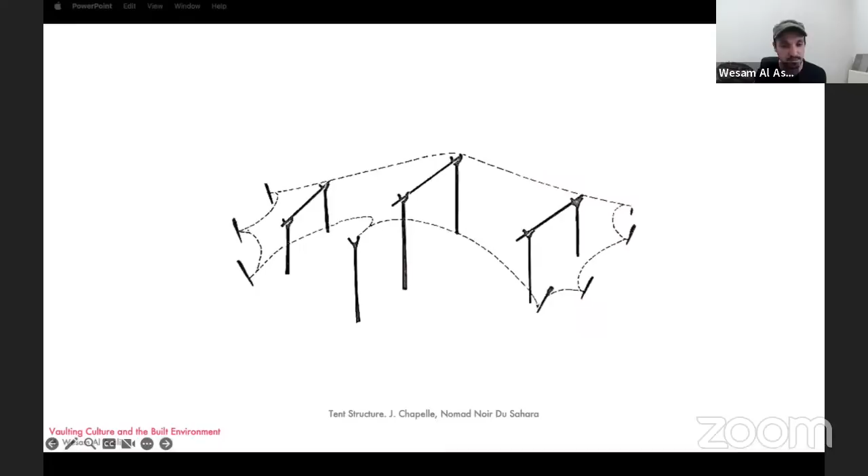Now, we note the main structural and architectural aspect of the tent through the drawing of the membrane, the poles, and the stakes. But what happens if we ask the same question of drawing a tent for those who inhabit and make these tents? We will not only get the notion of the structure, but also the cultural, architectural, and social meaning of the spaces described by the structure.

I think it is okay to have an abstracted vision of a phenomenon to understand how it works, but sometimes we forget how our knowledge as designers and engineers dwells in the making and inhabiting of the built environment. With today's pressing issues of environmental and social impact of design, the skill to dialogue between making knowledge and design knowledge is very much needed.

In this panel, we want to initiate these topics and question the relationship between, for example, automation and crafts, between materials and labor, and between hand and digital fabrication, so that all can be equally important and operate in the same sphere, and to harness the existing building culture and look for bottom-up approaches that learn and develop building crafts through technology.

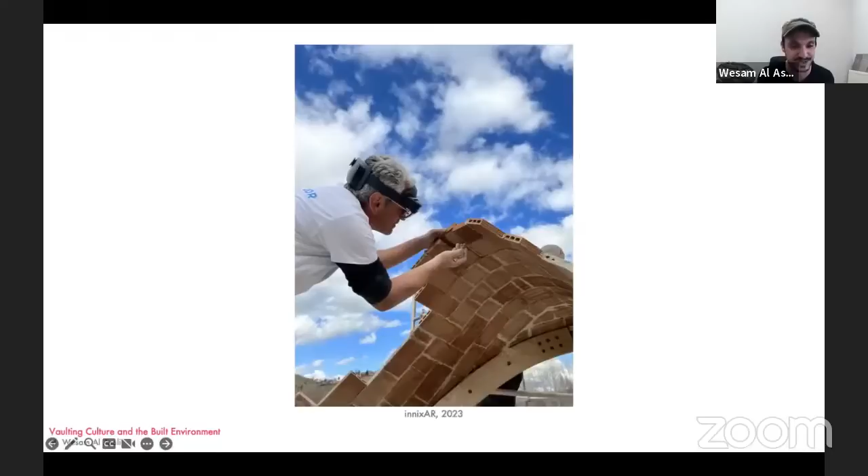And with this scene set, I would like to introduce the craft that we're talking about today, which is thin tile vaulting. Thin tile vaulting, and I know David will talk more about this topic, is a craft of making vaults which, as opposed to traditional masonry structure, uses tiles, lightweight tiles, and plaster of Paris.

It is constructed through gluing light tiles with a fast-setting mortar, and therefore they require, in many instances, very little formwork. The technique is also known as Guastavino vaulting in the US, referring to Rafael Guastavino, who took the construction technique to the US at the end of the 19th century, and Catalan vaulting as well.

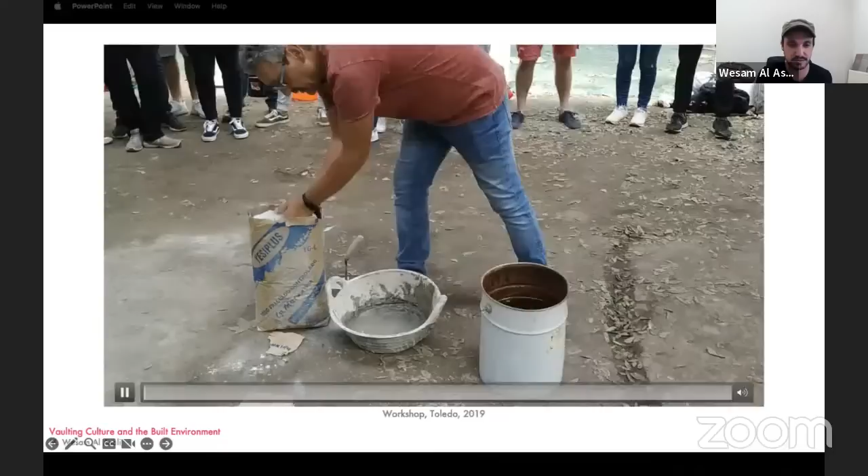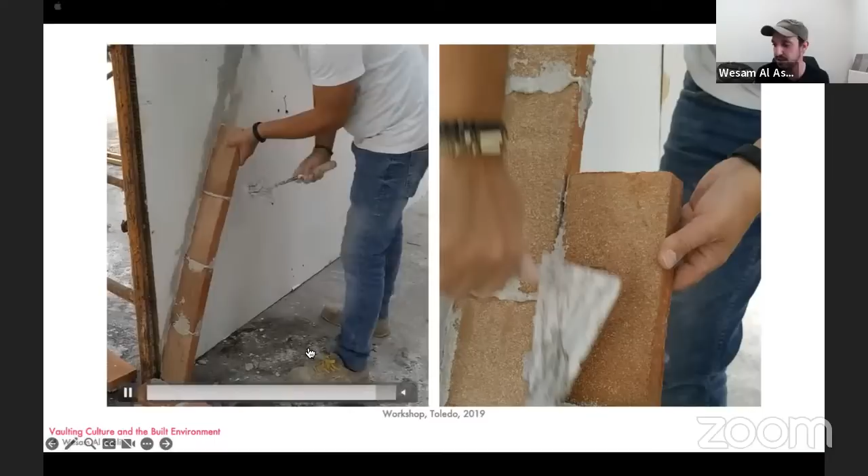And in action, this is a small video of the master here, Salvador, who's mixing the plaster, and then using the mortar of the mixed plaster to start gluing the tiles to the wall and to each other. Once the first coursing is there, the second one starts to be built consequently. After a portion of the structure is built, more layers of tiles are added with normal cement now. Could be lime mortar traditionally, but also cement mortar.

Tile vaulting is an ancient system with early evidence from the 11th and 12th centuries. The evidence shows it was concentrated in the western region of the Mediterranean, mixing techniques from North African and Roman architecture. From this brief, somewhat reductive timeline of the technique, we can notice how tile vault traveled across the Atlantic to the New World since the 18th century. But we also note, especially in this zone, how the technique has expanded during the early industrialization of construction, where we found it being patented and used in locations such as Belgium and Germany.

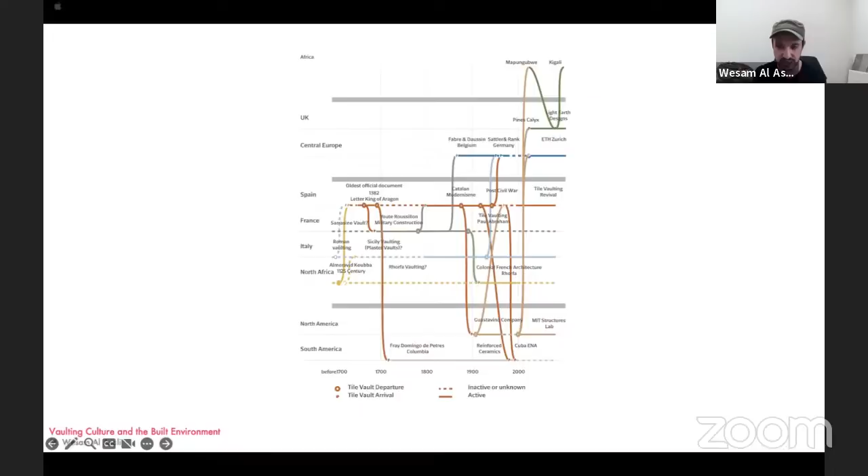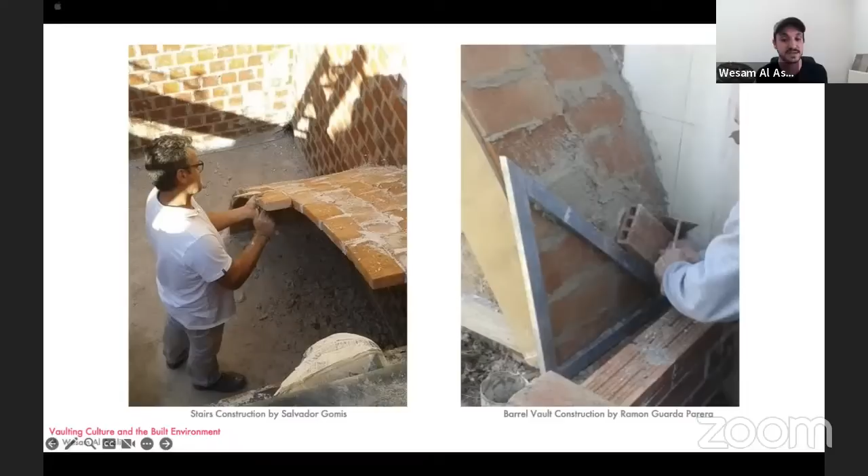So what I want to note is that I've mentioned very expressive and beautiful structures, but the continuation of tile vaulting would have never been possible without the contribution of its craft community. Because the technique existed and exists in the vernacular realm, it is able to move from utilitarian to expressive structures. The construction of tile vaulted stairs in Spain, for example, gave rise recently to the reactivation of the technique in many recent projects that we see in Spain, outside and inside Spain.

The inclusion of the method and ways of making is very important to the development of both engineering and crafts mutually. So as a prompt for the panel, I want to ask: how can we use technology to support and not replace builders? And in line with the UN 2030 agenda, with the Sustainable Development Goals that claim leaving no one behind, we want to ask how to move forward with a culture of building craft and not leave it behind us.

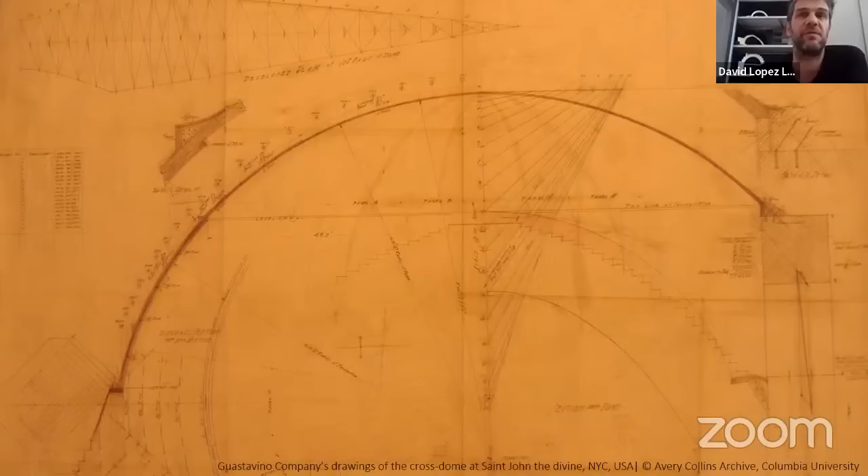Well, I'm going to focus on linking shell structural design and building crafts, and I would like to start with this drawing by the Guastavinos. It is the drawing of the cross-dome of St. John the Divine in New York. I like this drawing because it shows the material and structural efficiency of that construction. It is a dome that is nearly 30 meters in span. These qualities of material and structural efficiency make this shell structure so inspiring to me.

Apart from this structural efficiency, the reason why they got the commission of building this dome was mainly because they were able to build it without formwork.

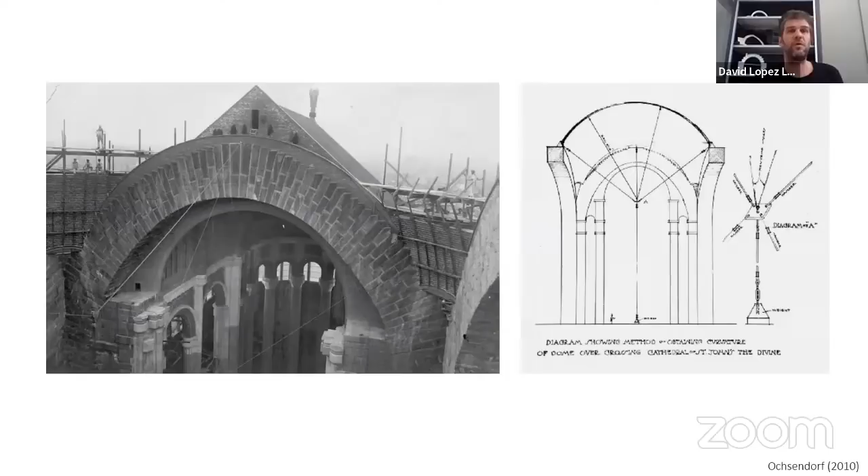Why? Because you only need minimal formwork to build a tile vault. In this case, they used strings to follow the geometry, with minimal falsework made of wood. What they needed was to follow the geometry in order to put the material where it needed to be. To build these amazing structures, they mastered shell design and construction, and knew exactly where the material needed to be to withstand the required forces. They also knew how to build their structures because they had this craft and know-how.

One of the tools they used to design and assess their structures was graphic statics. And in this case, of course, they could only do it in 2D.

These drawings and works inspire my work, and I guess also the work of many others. We want to follow this efficiency, this know-how of how to build structures in an economic way, but of course we want to use current computational tools to do it.

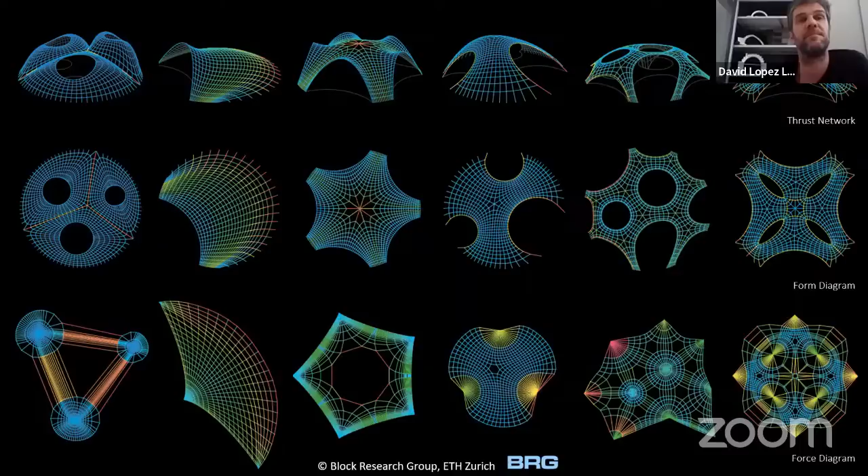Luckily, we now have tools to design not only structures with analysis in 2D, but also in 3D. This is a figure of some shell structures designed with the plugin Rhinovault, a plugin of Rhinoceros developed at the Block Research Group at ETH Zurich. It allows us to design compression-only structures, which is exactly what we want for optimized masonry structures.

Using this computational design tool, Rhinovault, we built already 10 years ago with Map13 Barcelona, the office that I co-founded with Marta Domenech and Mariana Palumbo.

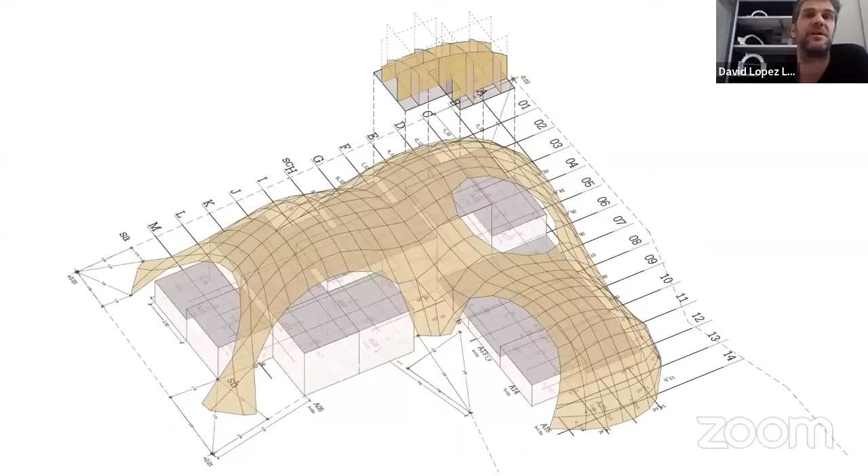We designed this pavilion called Bricktopia, and at that moment it was innovative because it was the first freeform tile vault open to the public at such a scale. In order to build such an innovative shape, it needed innovation in construction too.

What we did was link the shell design, which was an optimized structure, with a construction system that allowed us to build it economically and easily, or as easily as possible.

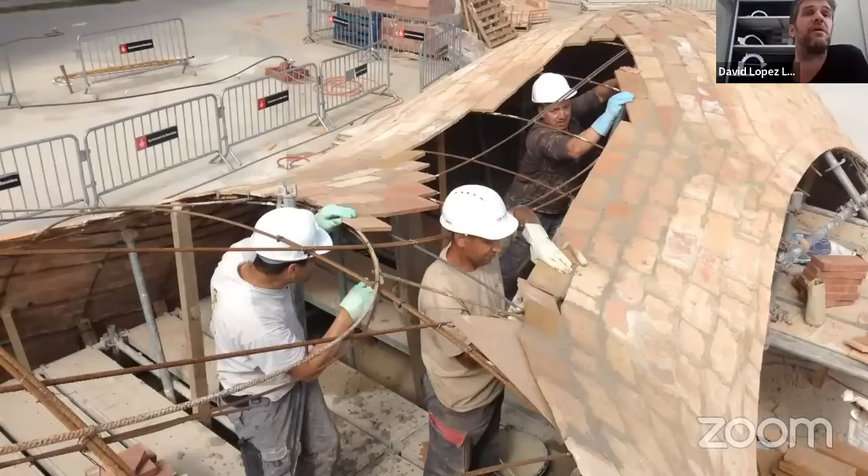So we provided some scaffolding and then cardboards that shaped the shell. On top of that, we put steel rods tied with wire to make the shape of the pavilion, so the cardboard could be removed and the workers could build the pavilion with a tile vault. This was such an experiment, the first free-form tile vault at such a scale.

We were so lucky to have 5 different construction companies that were experts in restoration of wall structures and experts in Catalan vaulting. So we had the best ones building it. Our first experience, in that case, we were sure it was going to be okay.

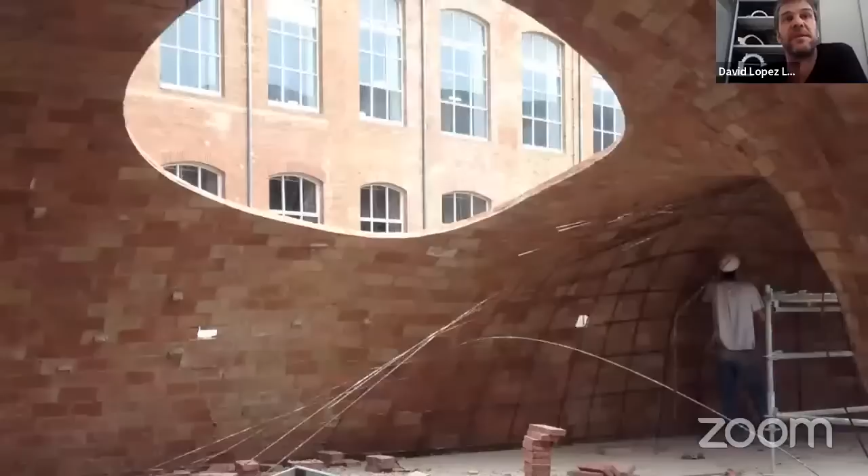As I'll show later, we later tried with either students or masons who were not familiar with the technique. For decentering, we just had to remove the steel rods and leave the unreinforced structure as it was. Then the steel rods could be recycled, and this was the result.

After that, in the next project, we always try to go a step further or try something new. This other project is a tile vault in Colombia. With the Block Research Group, in this project commissioned by UN Habitat, we wanted to export the technique, which had already been done in some other experiences in Africa. Of course, tile vaults exist in many places in the world, but for nowadays construction and for such a complex structure, we wanted to try it in Colombia, in Medellin. This is Medellin, and we can see there's a lot of brick, so there's some knowledge of masonry construction, but not of such vaults as we were proposing.

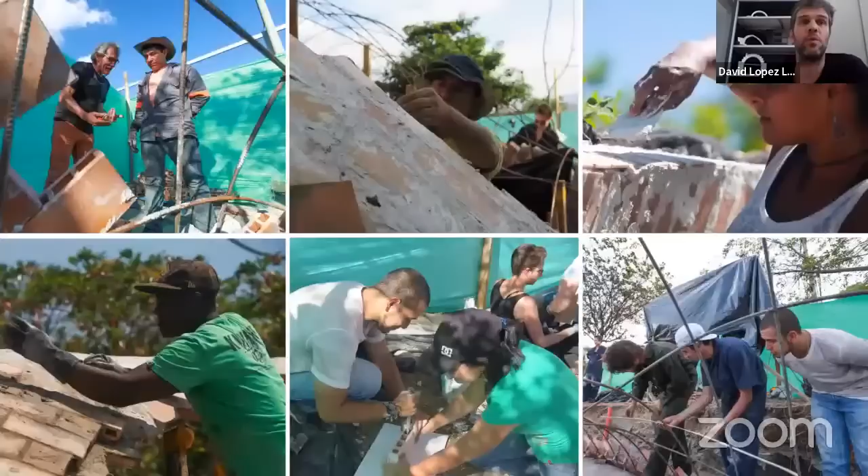So we proposed a similar scaffolding or falsework system, but with some changes. We tried to teach local workers and also volunteers who were at the World Urban Forum happening at the same time, along with volunteers from the university in Medellin, to build this vault.

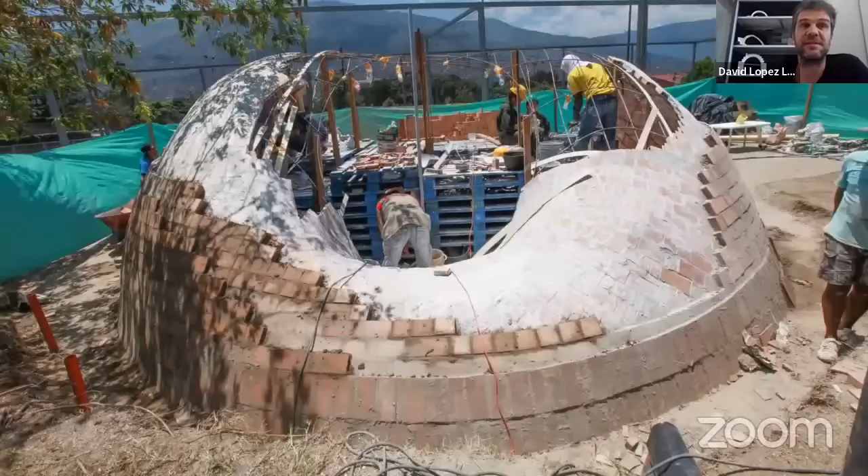We have to say it's a bit more difficult than working with experienced workers, but in the end the result was nice. I think it's worth trying to export the technique, which can be efficient, to other places, just teaching the local community to build with the local workforce and local materials.

Some pictures of the vault finished. I'm going quickly through the projects because I don't have much time, so I prefer to do an overview of many of the projects, and then maybe we can speak more about them. This is another project we did, in this case entirely with students.

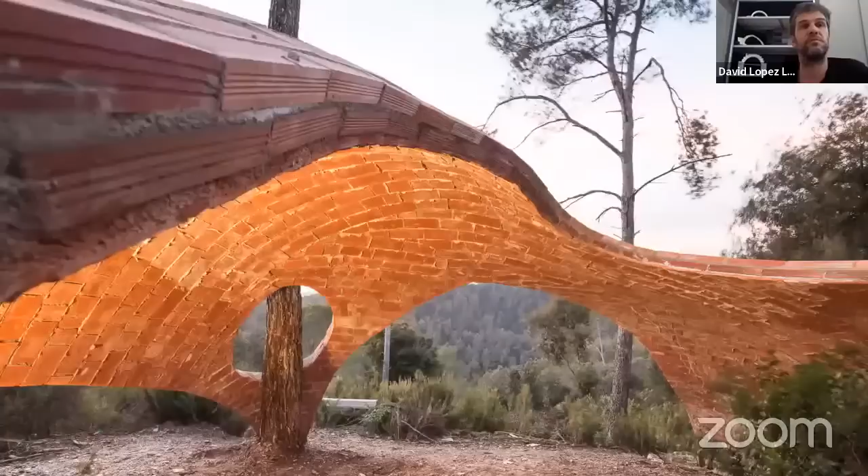It was together with the Block Research Group and Map 13 at AYAC. We proposed this vault. In this case the slope was difficult, and doing it with students was also not straightforward. We were also proposing to use some materials that they had on site to build the vault. This base, used as a horizontal platform to start building the falsework, was produced with materials that they had there on site.

So some little difficulties that added to our research and experimentation on the topic. This is the result of the vault, also optimized, designing it with RhinoVault, so a compression-only structure.

And then we thought that maybe we could go beyond compression-only structures, and see how tile vaults could be combined with reinforcement or with concrete. That's, in fact, the topic of my PhD at the Block Research Group.

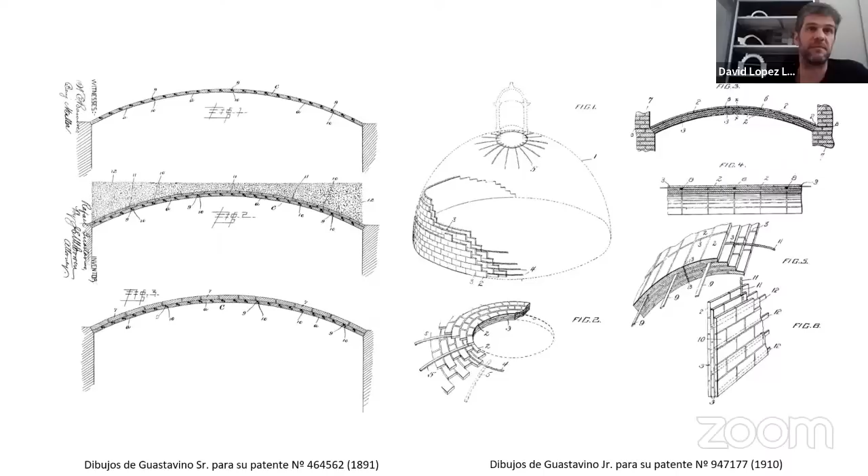I want to show again a figure by the Guastavinos. These are patents by the Guastavinos, in which they already proposed a mix of tile vaults with concrete or reinforcement. Going deep into it, we can see it can be a good option for many reasons.

One reason could be, for example, using this tile vault that you see in the image. This could be a typical tile vault, but then it could serve as formwork for reinforced concrete. We can start thinking about big span structures that make sense to do with reinforced concrete, but then the formwork would be very expensive.

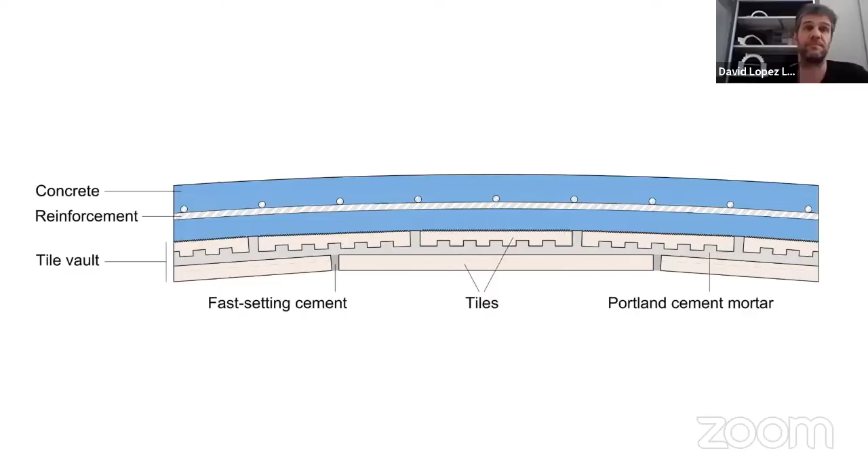But then we can use tile vault as lost formwork, or let's say integrated formwork, and have a hybrid structure. This is what we proposed in Map 13 for this pavilion, a project commissioned by the City Council of Barcelona.

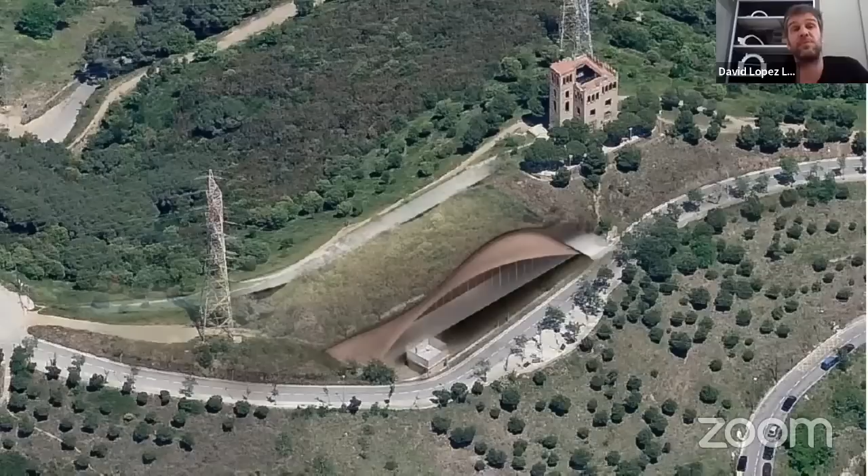It's in the mountains of Barcelona, where a water reservoir was built in the 70s. There was a mountain there, and they just cut the mountain and put the reservoir in. So for this neighborhood, which lacks sports facilities, we proposed this sport pavilion.

It would recover the shape of the mountain and recover this space for the citizens. Our proposal was to build a tile vault and make it serve as a lost formwork, or integrated formwork, for reinforced concrete.

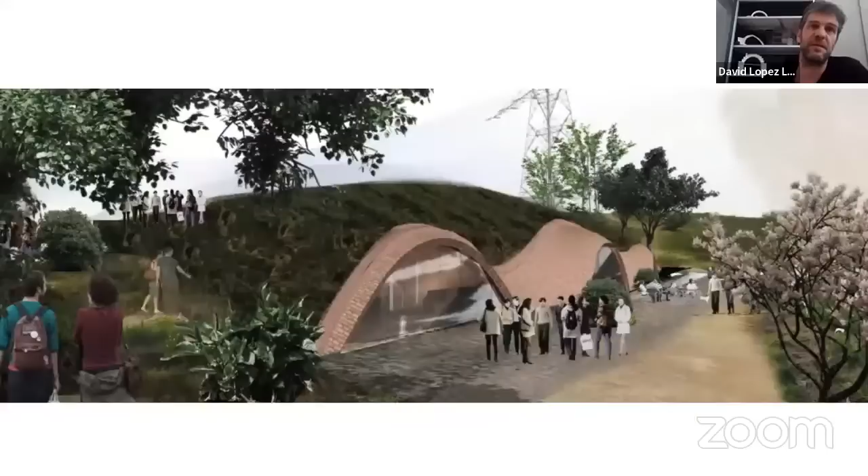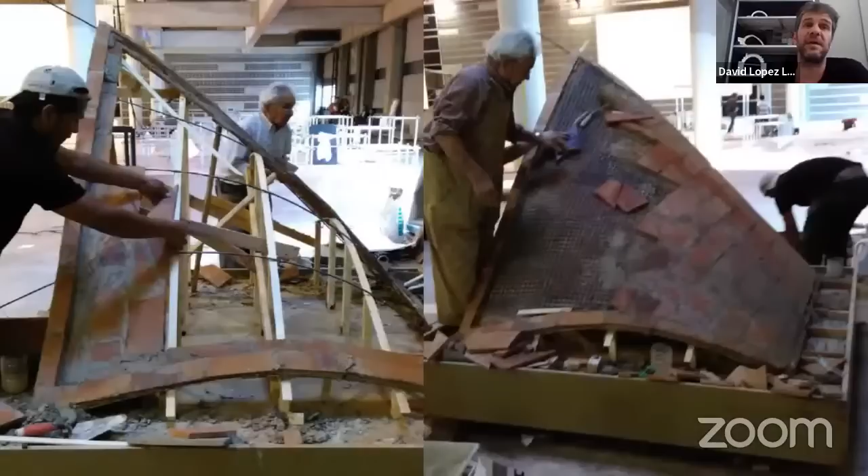So this is one of the proposals we've done, and another one combines tile vault with reinforcement. In this case we had a little commission for Construmat, a construction fair. AIAC had a place to show some innovation, and they invited us to show this piece of our ideas for future constructions.

We showed this tile vault with reinforcement in between the layers, so that we could start envisioning some cantilevering shapes. This is not chronological, because I'm showing different projects or little experiments from different times.

This experimental urban furniture that we did last year was once again our thought of combining masonry and reinforcement to make more exciting structures, structures that do not work only in compression.

Some pictures of it. In this case we had the great luck to work with Jordi Domènech, one of the main tile vault builders in Spain.

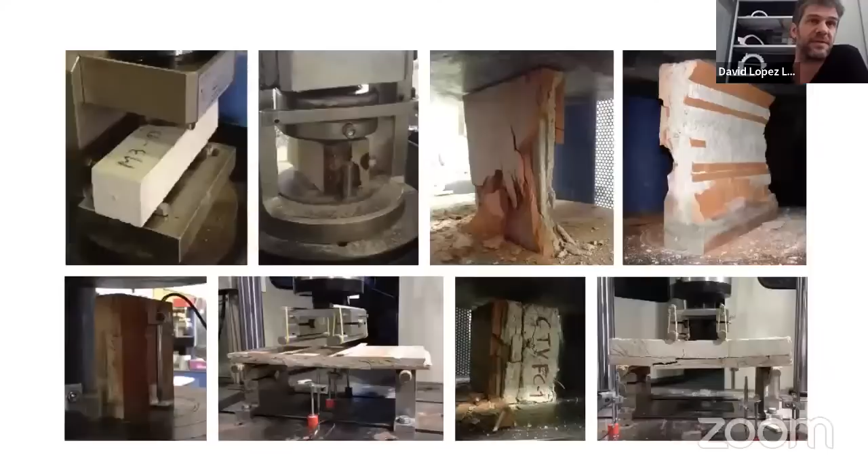It's not shown in these kinds of talks, but behind that there is more to know about this structural design. We need to do a lot of experiments with samples to know the material properties, the mechanical properties of the materials, and also I think it's very valuable to learn how to build this stuff by yourself.

And I was very lucky to have again Jordi Domènech and some people from a company called Urcotex, including Antonio Aro and Pep Brazo, who helped me with all these experimental tests or building these vaults at the lab at the UPC.

And it's a great experience also to be able to build them with your hands, to know how to prevent this kind of crafts from being lost.

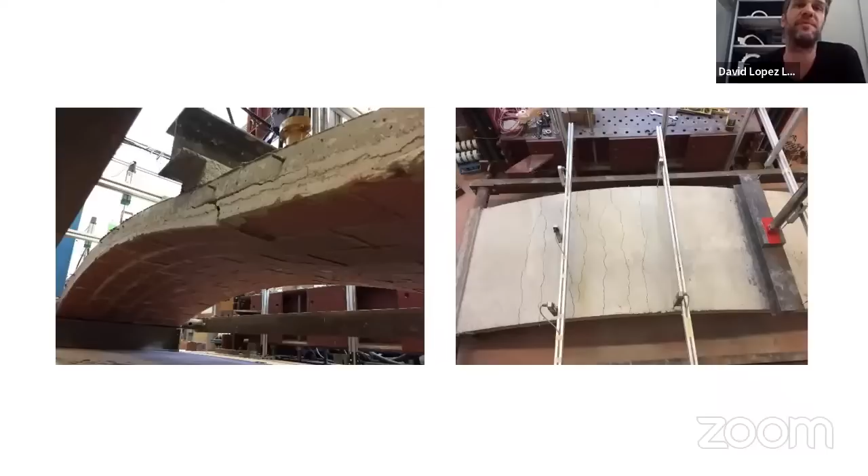So I want to say that all this research, these experiments with students and so on, come together and in parallel with these other experimental tasks in the lab, which allows us to know more about the structural behavior of these specimens.

So I've done some masonry vaults, masonry sail domes, also combined with reinforcement and concrete. And then there's also these FE models, or different kinds of structural models that we also need in order to be able to propose new structures.

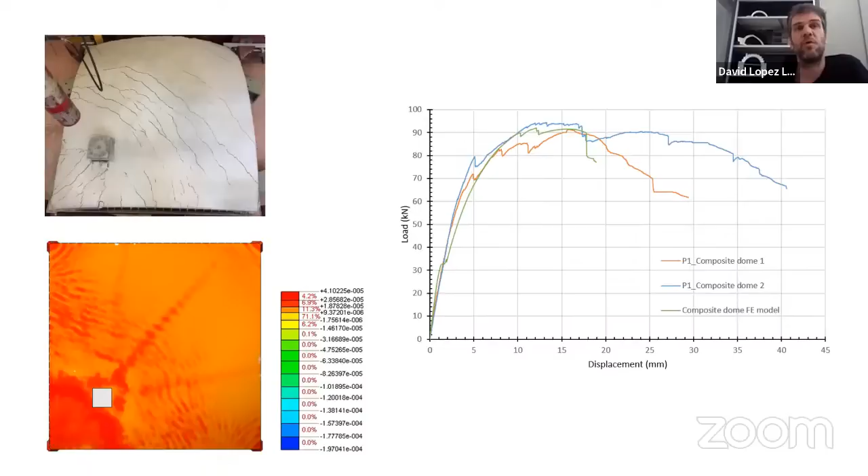And to propose new things, we can also propose these structures with the same principles, but with different materials. And the principles would be to be material and structurally efficient, and then know how this has to be built and who is going to build it, to really propose appropriate structures.

In this case, it's another workshop with students that we did a while ago. We wanted to show this shell design of appropriate form of the structures with this traditional hanging model, the chain hanging model, to build a vault in this workshop that we did in Covarrubias, Spain.

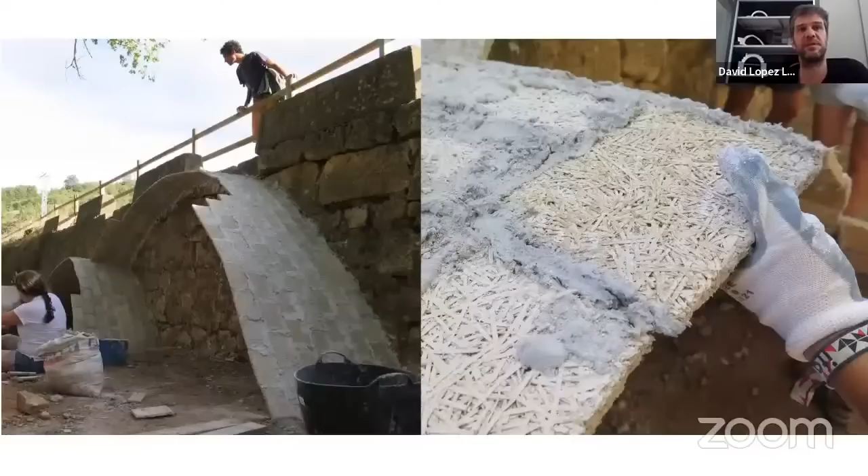But we proposed a different material that was so light that the first layer of the vault was built super fast, and also could serve, if built inwards, as isolation. So this is the result of this experiment, of this workshop.

As always, we did this load test and it worked. Of course, there are many things to do to keep improving in this research. And another completely different material, also with students, is...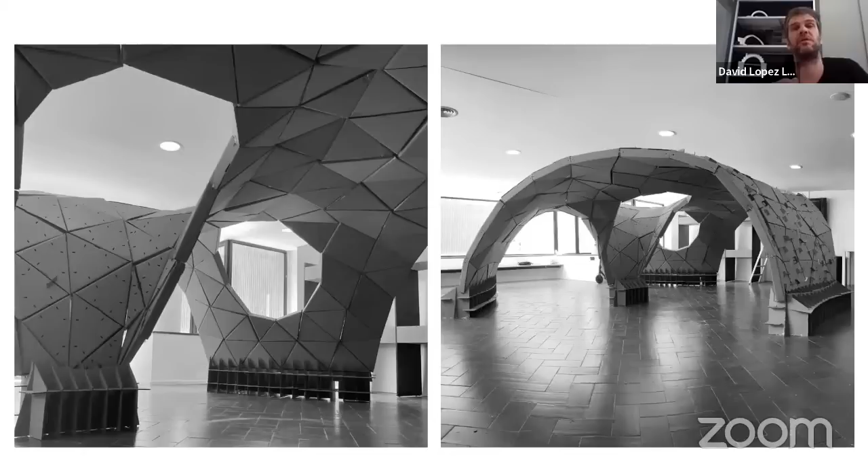Cardboard, but the same principles, using an appropriate structural shape. In this case, again designed with Rhino, but then taking advantage of digital fabrication, a completely different way to build structures, while being aware of this link between structural design, structural shell design, and the way things are built.

And last but not least, another material yet. Sorry that I'm going a bit out of the topic of brick, but I think it's also relevant to follow these principles. In this case, this is a project done in Norrköping, Sweden, a collaboration between MAP13, Edita Agostinovic, and Summon Engineering, led by Didrik Perendal.

This was a timber active bending grid shell that I also bring to this talk because it combines the qualities of being form-found, having a shape that responds to structural efficiency and optimization, and also has a way of being built that requires no formwork, reducing material waste and being more sustainable.

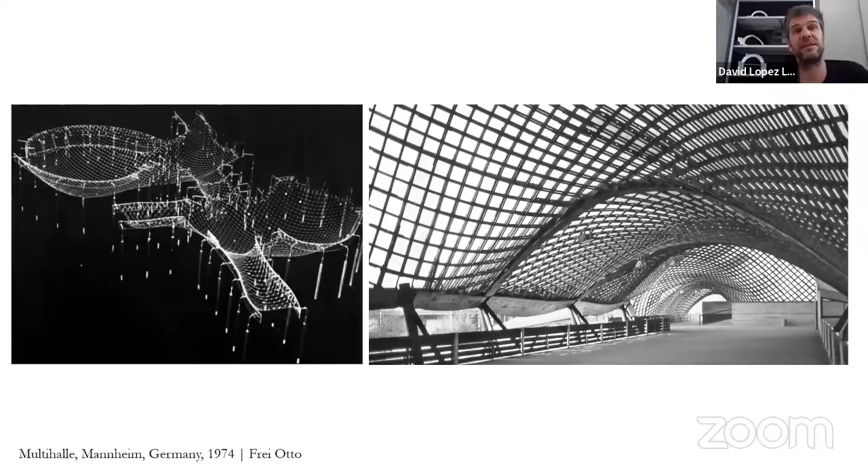And the technique to build it does not need formwork, because you can lay all the wooden lats flat, and then lift them to make the shape of the pavilion.

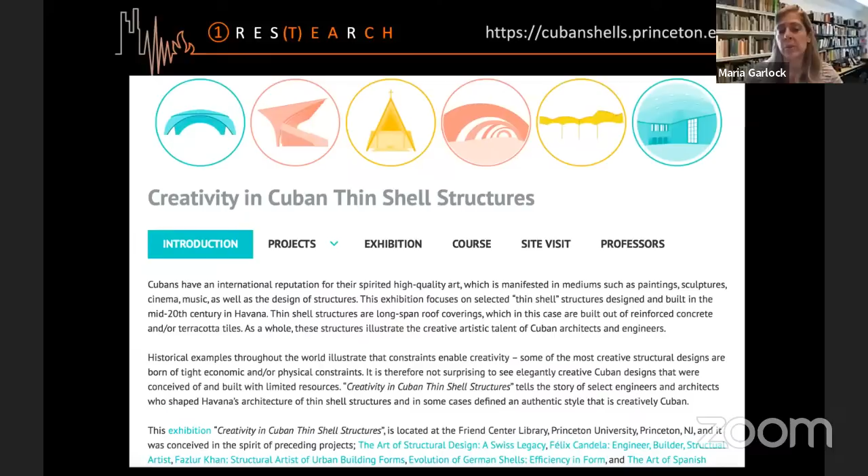The theme changes every year. In 2014, for example, it was the art of Spanish bridges, so we were in Spain touring and visiting bridges. In 2016, two years later, we picked the thin shell structures of Cuba, calling the class 'Creativity in Cuban Thin Shell Structures.' As part of the course outcome, students had to make a website as well as an exhibition, to encourage teaching communication to the general public—how do you communicate your ideas and excite an audience about the work you're doing?

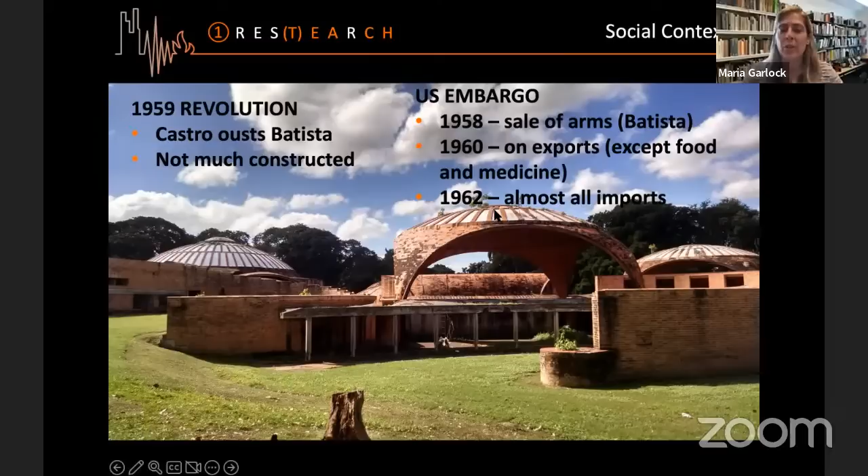As I mentioned, we want to put context into what we're learning, so we talked about a little bit of the history of Cuba. There was the revolution, Castro ousts Batista, and after that, not much is constructed. There's a serious embargo on US imports. The idea we teach in this course, and also in other courses taught at Princeton, is that constraints enable creativity. Sometimes these constraints come about due to war or whatever the context is, but it opens up the idea for creative thinking about, in this case, construction.

As I said, we also dive into some high-level engineering analysis, teaching shell theory to the students, as well as more humanistic kinds of studies. Within that study of structures in Cuba, thin shell structures, we uncovered quite a few that were done in collaboration with Felix Candela.

Felix Candela was famous for his hyperbolic paraboloid structures done in Mexico City in the 1950s and 1960s. He did a few designs outside of Mexico, some in Cuba, mostly in collaboration with Max Borges and his brother Enrique. Max Borges is someone I'll get to in a few slides, because there were a few structures he was credited for being part of, but I'm not so sure of that. So we're talking about Max Borges, and we're talking pre-revolution, before the embargo, before Castro comes in.

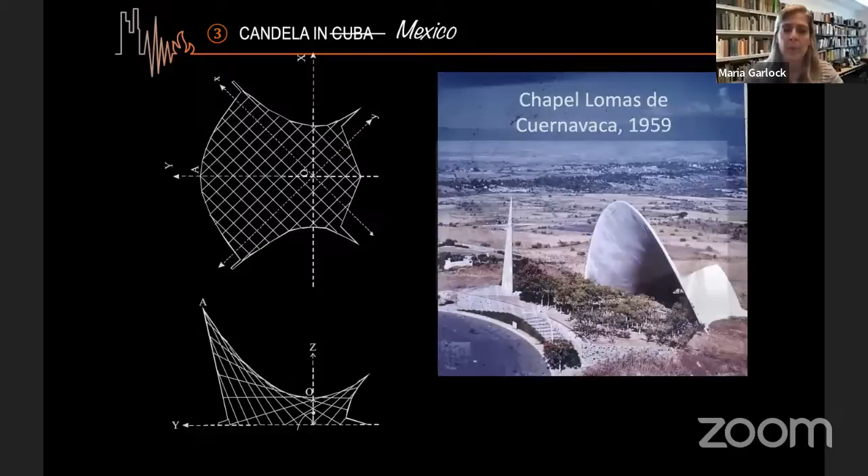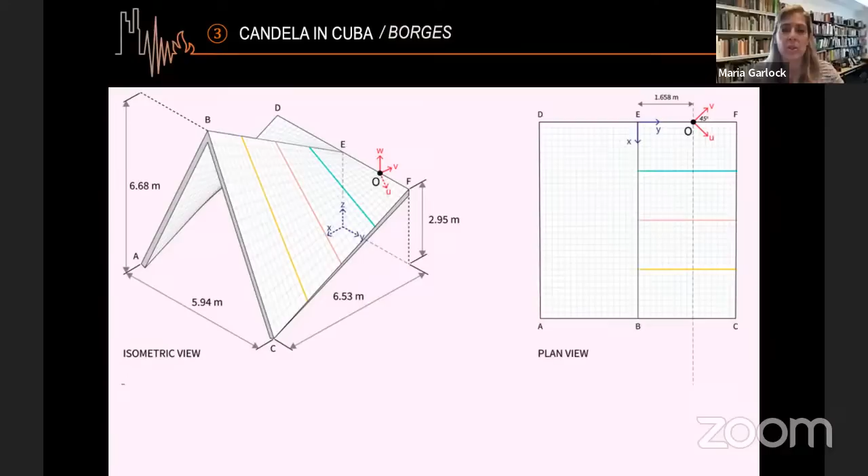So when we visited with the students, they were able to take measurements and lay out the geometry of this tomb. And what we can see now are not just the geometry and layout, but with this information they were able to create some structural analyses and understand the structural performance of this tomb.

One of the most famous shell structures of Havana, Cuba, is the Tropicana nightclub. For this, Max Borges, who was the architect, received an award. It's still active today, and fortunately we were able to see a performance inside of this space. It is quite a spectacular space, and here's a rendering of the five-barrel shells that form that almost telescopic-looking structure.

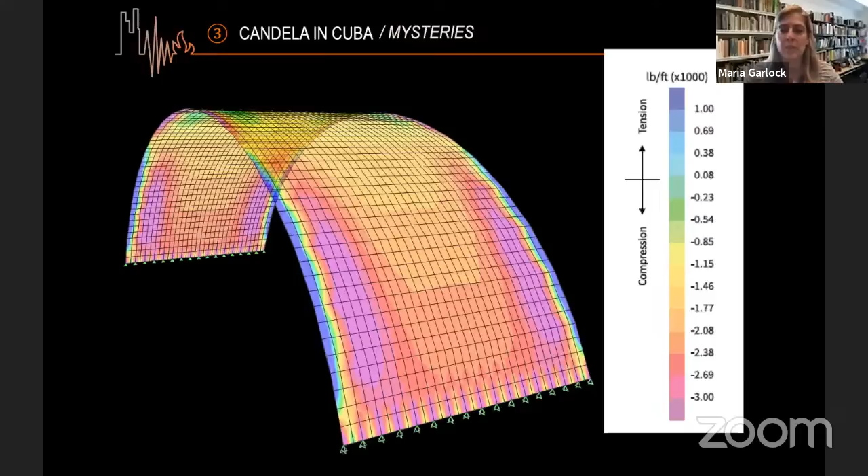And the students, again, there was no information in the literature about the dimensions of the structure. So using a digital laser, they were able to take some coordinates and dimensions and make some structural analyses of these shells, which have essentially always just confirmed the structural integrity.

If we go into the literature, there is an indication that Felix Candela collaborated with Max Borges on this structure. I've looked and dug into the archives at Princeton and at Columbia. I can't find any evidence of this being a fact. In my opinion, Candela did not collaborate with Max Borges on this project. Not only are there no drawings, there's a lot of communication in the archive at Columbia between Borges and Candela, and I read through all of that. There has been no conversation about this project.

Another important shell structure in Cuba is Club Nautico, by Max Borges again. And the same conclusion here, where there are references to Max and Candela collaborating, there really is no evidence. If we dig into the archives, again, no construction drawings, no mention in the many correspondences between the two men. So that is the Max and Mysteries alliteration I was referring to.

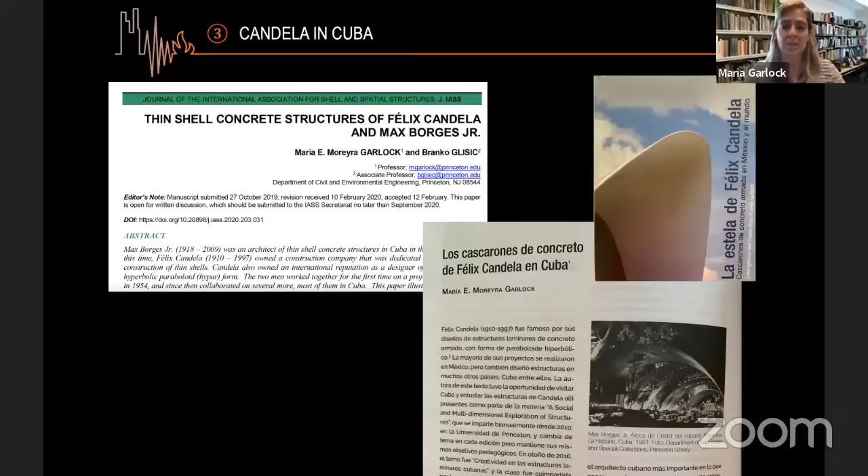From this surprise of how many Candela structures there were in Cuba, I have published quite a bit on Felix Candela. Taking this opportunity, working with the students and the trips and the research that we did as part of the course, we were able to publish a paper in the IASS about these shell structures of Candela and Borges. I was also invited to write a piece for a book published about Candela and his works related to Candela in Cuba. So this is an illustration of how, as I said in the beginning, we sought out to just teach a class, and it ended up bringing in a whole lot of discoveries in terms of research.

Another area of discovery related to this class we taught in Cuba was the School of Ballet. So Catalan, or counterfeit, and this is different from Candela. Candela was pre-revolution. Now we're talking about post-revolutionary structures, and I'm going to focus specifically on the National School of Arts. There were three architects involved in this project, listed at the bottom of your screen, and there were five schools. I'm going to focus on the School of Ballet, where the architect was Vittorio Garatti.

Before going to visit with the students, the School of Ballet, and even before the reconnaissance tour, before taking the students, we contacted Vittorio Garatti, and he directed us to Jose Mosqueda, who was still living in Cuba and was essentially his right-hand man. He worked very closely with Vittorio on this project, the School of Ballet. So we were able to contact him, and he went on site with us and showed us around this project, giving us also stories about his own personal experience in the design of these structures.

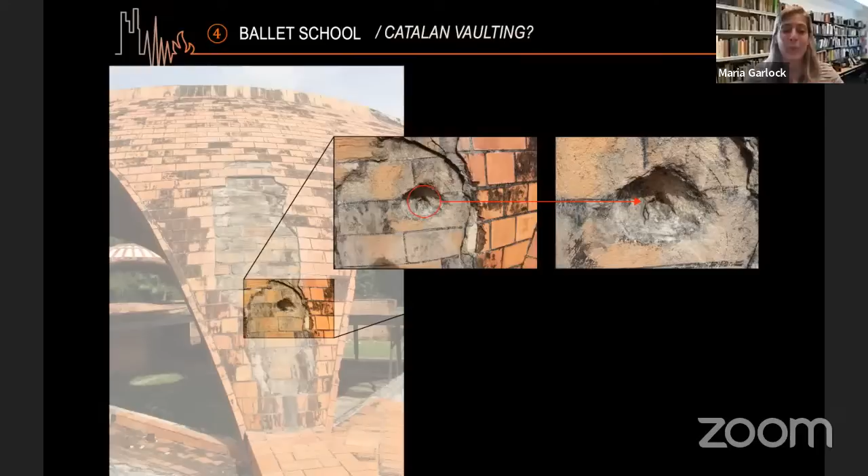This led us to question, what is this built out of? Because from the edges, you expect it to be layers of tile, and that was the intention. That was actually, in the end, probably an aesthetic touch, but it was actually a reinforced concrete structure. So in approaching Jose and asking, what's going on, is this reinforced concrete? Jose would say, yes, of course it's reinforced concrete, as if it was a matter of fact, and as if the world knew that was indeed the case. Opening up his photo album of the construction photos, Jose showed us the construction procedure, which validates that it is a reinforced concrete dome structure.

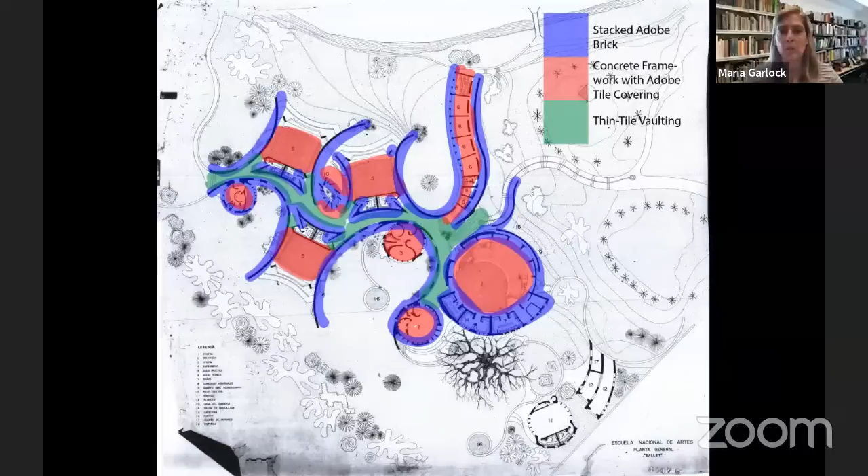So here you see the formwork and the steel, getting ready to pour the concrete. Isabella, one of the students in this course who developed research based on the School of Ballet, did an inventory to indicate where we have stacked adobe brick, where we have concrete, and where we have thin tile vaulting. There is some honest thin tile vaulting shown in green, and these are essentially the covered spaces in between the classrooms and the dome.

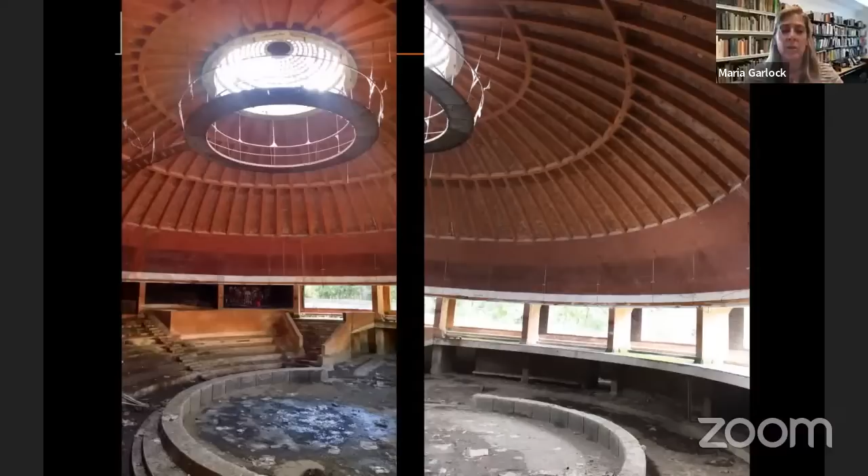So the largest structure in that space is this ballet school, the dome structure that you see here. Again, it's intended to look like tile vaulting, but it isn't. It's a reinforced concrete structure, as indicated by the drawings, the construction drawings that Jose showed us.

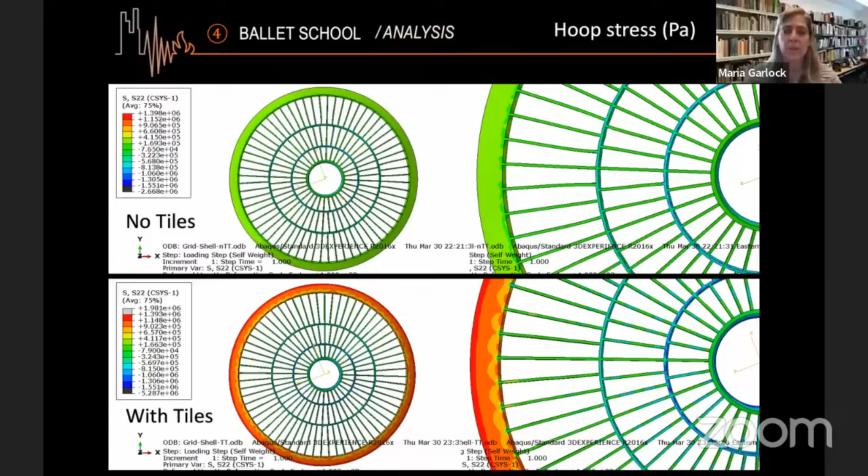Isabella took this structure and made structural models of it to validate the structural performance. Here are the meridional stresses and hoop stresses, and it all results in a conclusion that it is a structurally sound structure. She also did some graphic static structural analysis and some basic shell theory analyses to validate the performance and validate these more complex models as well.

From this, just like in the Candela project in Cuba, we were able to publish some journals about this structure. The first paper was Isabella and the research that we did as part of this course. The second paper was a more detailed analysis leaning more towards the performance of these structures, with a purpose of possibly rehabilitating them and bringing them back into use.

The second project was done in collaboration with our colleagues in Italy: Sofia Celli, Federica Ottoni, Davide Del Curto. They are in Italy, working in collaboration with a team at Princeton.

In summary, the integration of research and teaching was really something that I hadn't yet experienced. I sought out with my colleague Branko Glisic to teach a course about Cuba and Cuban shell structures. I didn't expect it to explode into so many other research opportunities and discoveries that were good, with new opportunities for everyone.

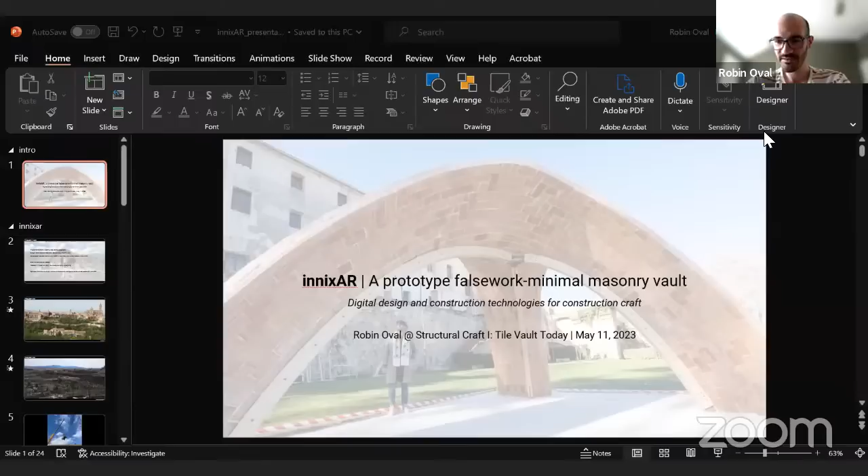And now we will move to Robin for his presentation. Floor is yours, Robin. Thank you. Should be this. There should be a single slide. Nice, that's great. Hi everyone.

I'm glad to contribute to this panel. I will be showing a project that we've done recently in collaboration with Wesam: the innixAR prototype, a thin tile vault where we're trying to minimize the falsework, including guide work and centering. I'll show you how, with the team, we've been leveraging digital technologies regarding both design and construction craft.

This was part of the SCAF-free project based in Princeton, but with an extended team. That project grew from our collaboration with Wesam when he was a visiting scholar in Princeton, and we've been developing it with the aim of showcasing how we can minimize the falsework for masonry construction. It was a fairly large group, a fairly rich collaborative process between researchers and visiting researchers in the form finding lab at Princeton.

We had the chance to work with Bovederos, a master vault builder, Salvador Gomis Avino from Boveda Tabicada, and a collaborator of Wesam on the Circa initiative.

Wesam was hosting us at IE University. You can see the beautiful site with the university at the bottom, just outside the city, with an amazing cathedral on the right and the famous aqueduct also right outside the picture on the left.

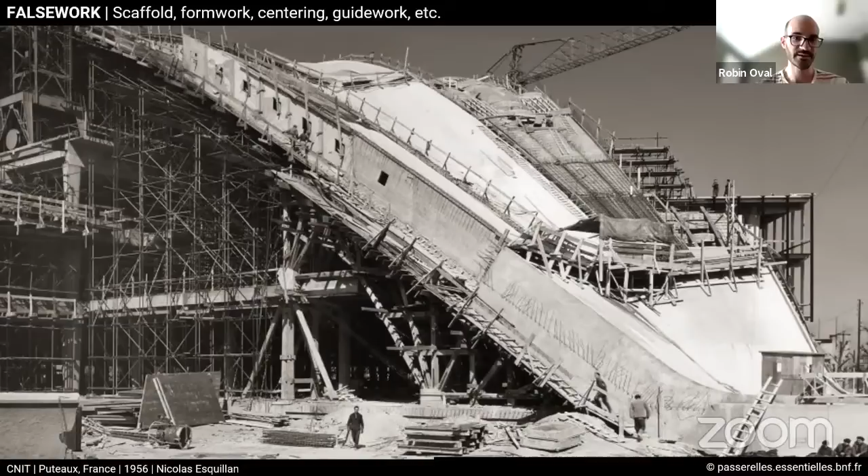The structure might be extremely efficient, but while building it - as you can see on that concrete shell, the CNIT in Paris - most of what you see here is actually going to be removed at the end. That's a lot of hours, a lot of time invested, and that can actually deter you from leveraging these efficient structural systems.

So that was a concrete shell, but in masonry, because of its different nature, builders have been developing methods to reduce or even remove the need for false work or centering. Some of these strategies are a couple of millennia old.

You can see the corbelling technique, just stacking bricks with small cantilevers, and thin-tile vaulting, which we're particularly interested in today thanks to the fast-setting mortar and the lightness of the bricks. There's also pitched vaulting, where you incline arches and leverage friction to build arch by arch.

Then you have a couple more strategies that are also extremely interesting: adding external forces or pre-stress, maybe with cables or hanging weights, to compress an arch while it's being built. Also, you see it in Gothic construction, but even before that in Spain and the Arabic world, where it provides this hierarchy in the vault.

You first build the arches, and then you build the rest of the vault on top of it. You also have the herringbone pattern used by Brunelleschi at the Santa Maria del Fiore Cathedral in Florence, where these bricks actually somehow cantilever.

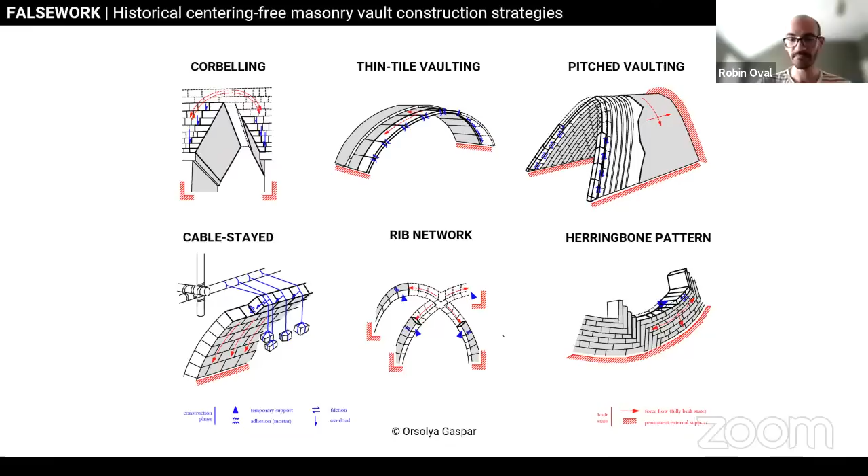They're being clamped by one course of bricks, and they're allowed to provide additional extremely stiff support for the next one. These are techniques that have been inspiring us, and the team has had quite a lot of experience in terms of first construction, thanks to Salvador Gomes Avino.

You can see on the left this beautiful project that was completed a couple of months ago. What's interesting is that from the top view in the middle, you can see the guide work - mainly used to follow the right shape of the vault, to build it as designed.

It also acts as some light support, or a couple of simple supports. It's not as complex as what we saw before for a concrete shell, but it still takes time to put together. It's the same for even smaller projects that Salvador and Wesam have been doing with Circa.

You can see on the right that before you build, even if you use thin-tile vaulting, and as you've also seen on the project of David, you have to start somewhere - whether it's a wall to hold the first arch.

Or whether you want this kind of guide work or centering on the boundaries, you can see at bottom right these flexible metallic strips that are bent and propped together, and then you actually complete the dome from the outside in.

So you do need this - even on a small project, you still need some level of false work. And here we've been trying to leverage various experience that we had in the team.

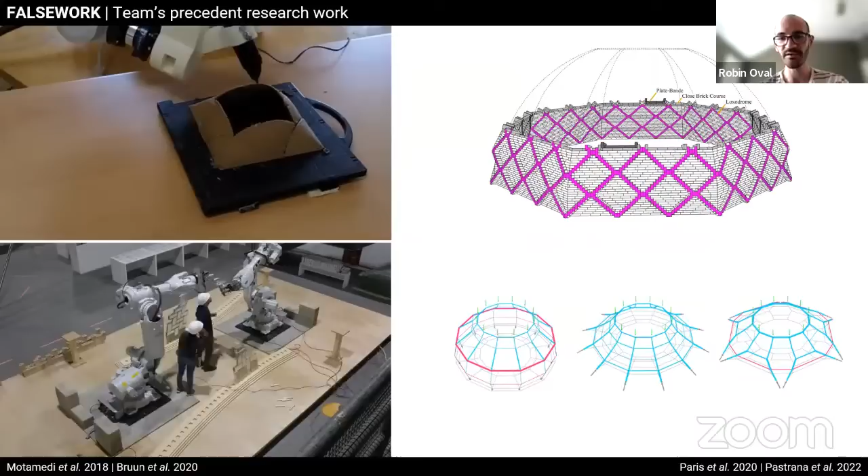At the top, we find inspiration from Nubian vaulting and Persian architecture, applying it to 3D printing clay shells without supports, using collaborative robotic assembly to build the first arch that will then act as support for the rest of the vault.

Understanding the mechanics, the herringbone patterns of Brunelleschi with this flat arch or plate-bande system, allows you to build that additional internal support. We're also investigating form-finding techniques where you have an idea of sequencing, achieving equilibrium at different stages of the process, or in the analysis of a structure.

With all this inspiration from historical methods, existing construction work done by the team, and research directions, we've been developing a strategy to try to drastically, almost caricaturally, remove as much falsework as possible in that project. Schematically, we have this vault with 3 arches, so this 6-sided dome.

Thanks to thin-tile vaulting, we're able to remove all the centering that would be filling the vault, so that we only need a couple of arches to act as guidework. We have a waffle frame kind of thing, as we've seen before, maybe arches on the boundary, but these are quite complex to make, especially with a more freeform structure. You have double curvature, so they're hard to build, and you still need some guidework.

So what we're using is inspiration from rib architecture, having this hierarchy. We're using a spine, which is what you can see in green. So instead of having long curved arches on the boundary, you have this more efficient and rationalized planar set of arches in the middle that act as a spine that can be prefabricated. And then you still need guidework to inform the builder - so what does the rest of the shape look like?

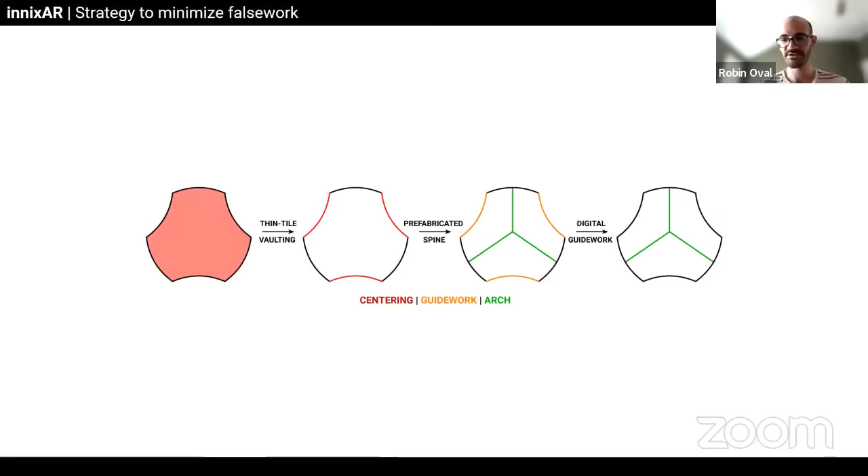To remove that need for guidework, we are leveraging augmented reality for construction to move from physical to digital guidework.

We first developed the construction strategy, and then that informed the design process. So we have a 4D funicular design process, in the sense that we're integrating the construction assembly steps and time components into the design. For that, we had to have a dialogue between finding the right shape of the design, but also what should be the pattern and what should be the sequencing - what is the hierarchy in terms of construction?

That's why we have this spine strategy that gives you this 3-legged arch in the middle, and from that you actually see that naturally forms a crease, because we're building from the inside out, and you want this natural slope, so that when you're putting a set of arches, they rest upon the previous one and not below. So the shape was naturally dictated by this constraint, embedding objectives that stem from construction.

This is a sequential form-finding process led by Rafael Pastrana. You can see the form-finding of a spine initially that will be prefabricated. Then we're adding step by step, as a force network that represents the addition of a couple of courses of masonry - we actually add those.

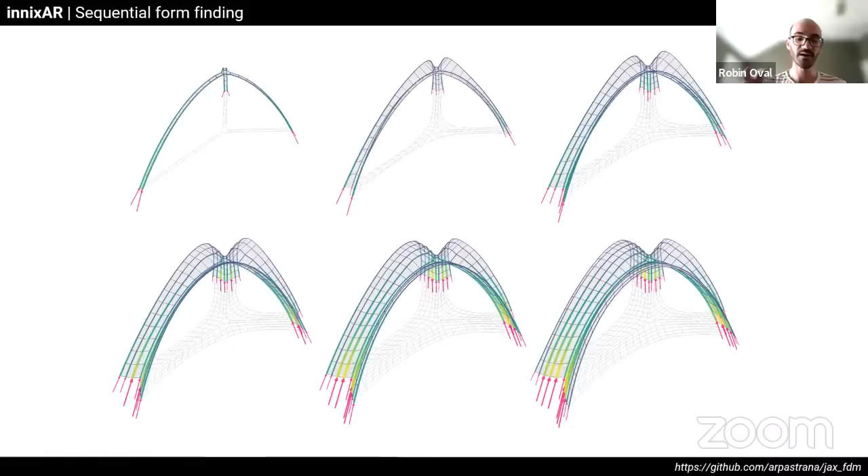So the first layer would be 33 millimeters at peak, and here were the deviations at the different stages, around 20-25 millimeters. So it was a successful process thanks to this constrained form-finding optimization process in sequential steps.

Then came this force network, then came materialization, so the vault of the coursing. You can see schematically the brick coursing in gray, but also in brown you have this herringbone brick, inspired by the Brunelleschi construction - that's work done by Vittorio Paris, and you can see that they provide small steps.

The goal of these bricks is that while you're building thin tile vaulting, you have to rely on fast-setting mortar, and sometimes you have to pause, take a break, move to another section, and let the mortar cure. Here, that's a stability system that does not rely on the material, but relies on the arch that you're currently building - it relies on the clamping of the brick by the previous arch. That's why we integrated that tessellation into it.

So as a materialization of the vault, below you can see the spine that's actually prefabricated and rationalized, so that it can be simple to install on site. It's made of layers of plywood, CNC-cut, accurately produced off-site, connected together. You have these 3 arches that are all planar, so they can be made from regular boards, and then connected by steel nuts, between them and at the anchors.

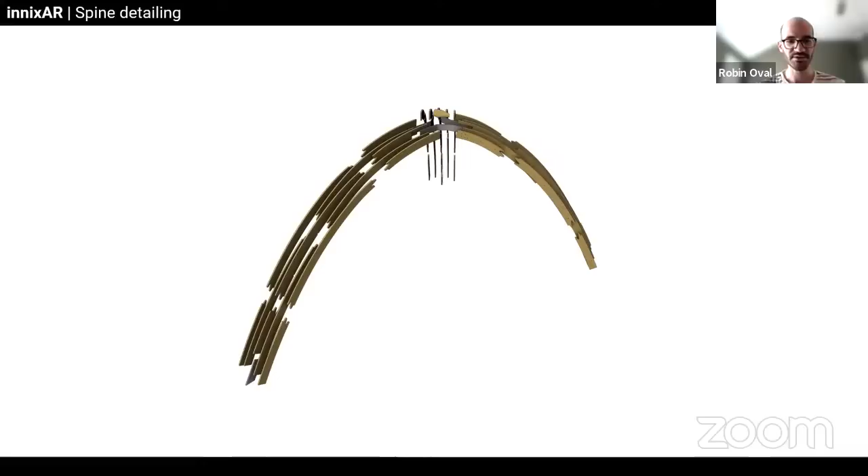The 3 arches of that spine are made separately, pre-assembled off-site, and then assembled on-site, which I'll show later. That was a process using very simple elements, and what we relied on was the accuracy of these things, because we were using the spine also as an initial reference in the physical world for our digital guide work.

So we're using augmented reality, with headsets for the builder, because masonry construction has so many defects and things that are hard to foresee, due to the nature of the bricks and mortar. We're not trying to automate the construction process, but to bring tools to the builder, Salvador, so he can make informed decisions and solve problems with intelligence and experience on site, while we're only providing him the design intent.

So here you can see the different curves that provide the guidework. We have this alternation of lines in yellow and green, which are the main course lines. Transversely there are some L's so you can visualize the entire shape of the vault and understand its double curvature. But we're not providing him the exact tessellation - it was up to him to adjust, adapt, and decide. We're only providing information about the irregular parts of the vault, the gray areas showing the herringbone bricks, because those are the singular parts of the design.

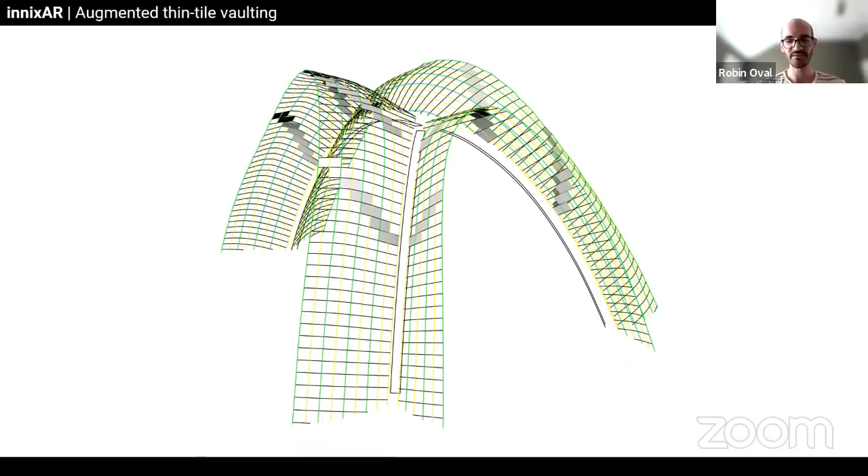Then what you see in black are the key lines of the spine, which helped us as calibration between the physical and digital world, so we could leverage that guide work. That's what it looks like on site - a snapshot from one of the HoloLens 2 headsets, where you can superimpose the two worlds.

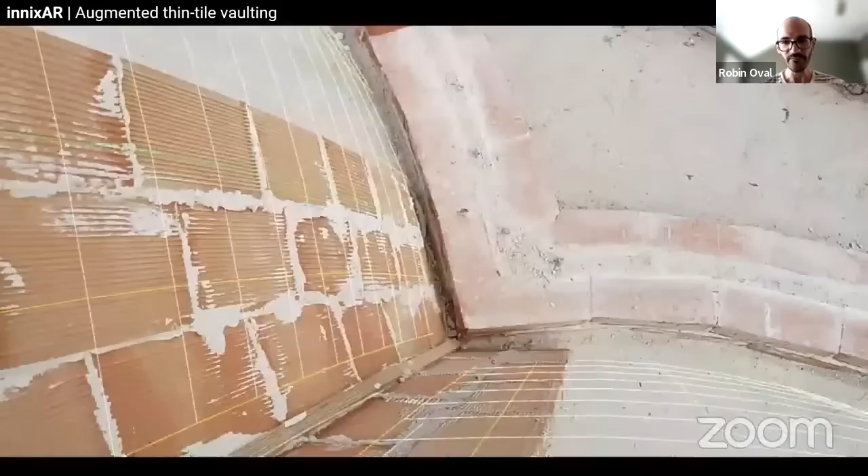You can see here we're almost halfway through, with the superimposition of the two worlds - that's what the builder was seeing. That's Salvador building a couple of bricks, showing the development and application of the craft from the Bovedero himself.

You can see here on the very regular part of the vault, just putting bricks one by one, but extremely efficiently. Thanks to experience in craft, it's about putting this fast-setting gypsum mortar on two sides of the tile, and then adding it to the vault.

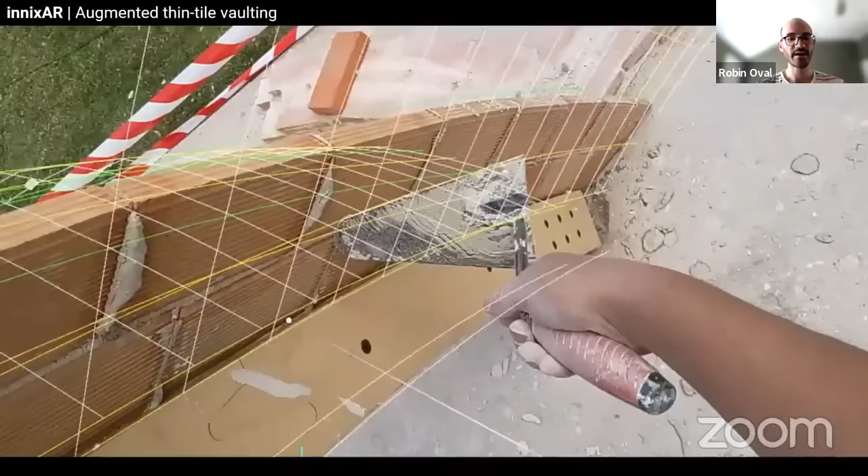The vault's geometry was informed by the construction process. We were careful about what slope the vault should have, taking into account the sequencing of construction. That's why it was fairly easy to put these regular bricks without having to hold them for too long, which would be the case with more horizontal or shallow vaults.

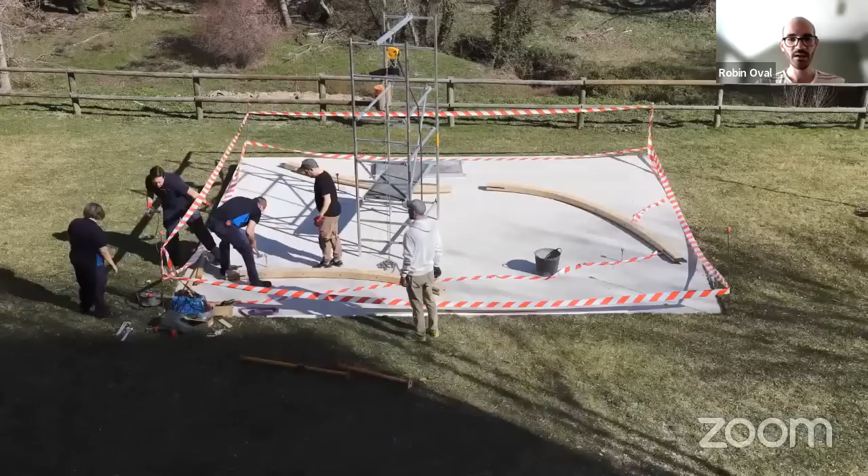Now let's see the time lapse of the construction. You saw just in a glimpse that the spine was assembled in maybe half an hour, pre-assembled and assembled on site - that was the only physical guide work we needed. This spine or rib was integrated into the vault, and then the construction process started.

First, the production of these squinches - small triangles that are part of the top of the vault - which make the smooth transition from one straight arch to the other. Here there's quite a bit of cutting to be done; you can see the workstation on the right, where clay dust colors the grass orange. Once you make it to the regular part of the vault, it goes much faster.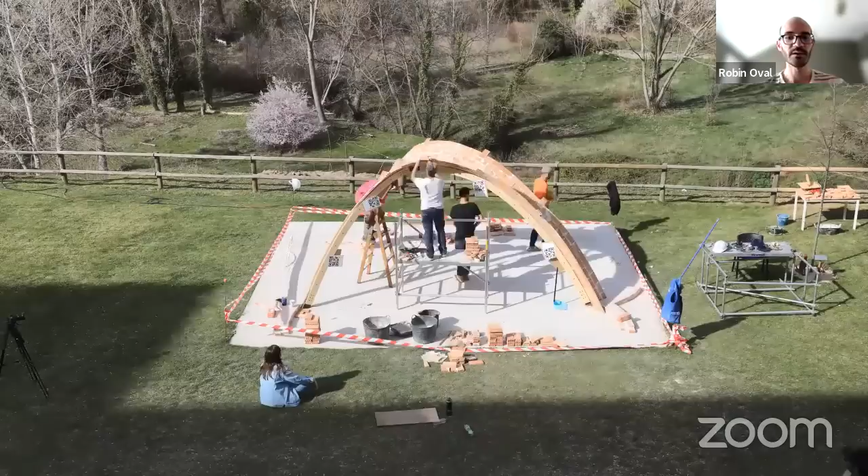We faced a couple of changes at the start because we were leveraging that augmented construction technology for one of the first times, picked up in the last 6 months or so. We had to calibrate things from our initial indoor experiences in a controlled environment to the reality of a construction site. But after a couple of rookie mistakes, we managed to be efficient and productive.

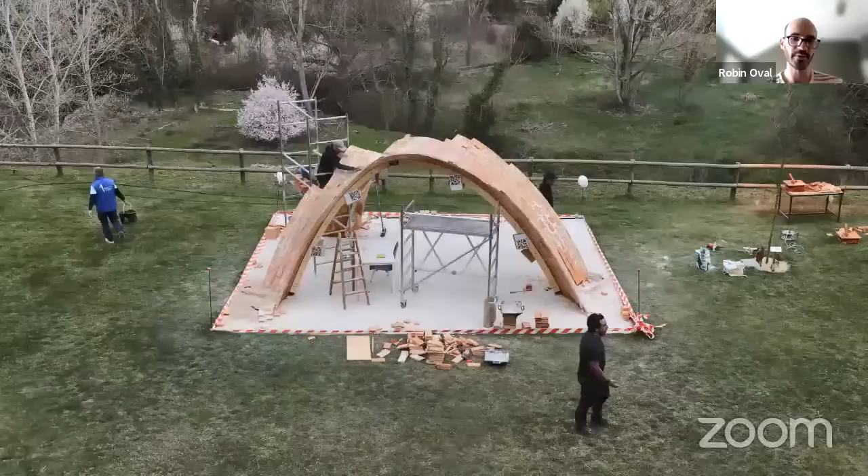We actually built the vault itself in 4-5 days, including the second layer. You can see the second layer of thicker bricks being assembled at the same time, reaching from the top so we could have different workstations - Salvador using the augmented reality goggles completing the first layer, and us working on the second layer while also assisting him. This is the final day, at least for the actual vaulting itself, where you get the completion of the vault.

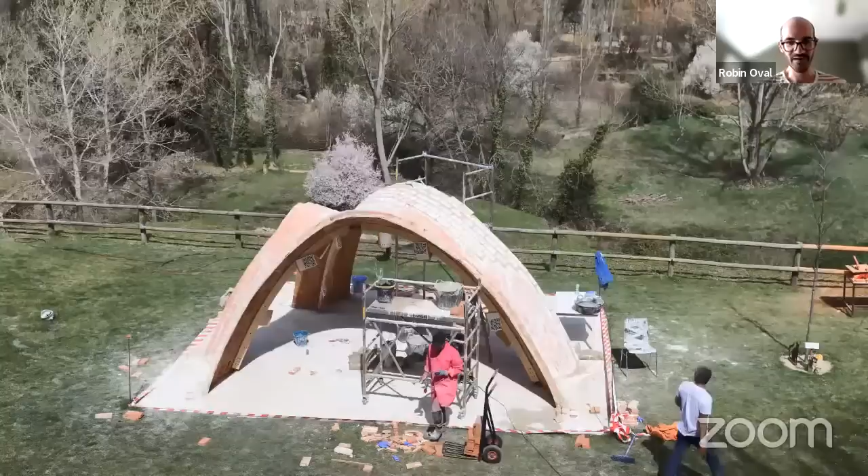Obviously, the second layer goes much faster. There's no need for digital guide work because the first layer is there. That was a faster step. And then that's when the structure is done. You can see that was already used, in use.

There was an event a couple of weeks ago on the IE campus.

But this is not, we didn't do this just for the sake of putting a pavilion to it. So here we're crunching the numbers to actually see what was it, let's say, in general, the cost of building that vault. So it was not just about how much does it weigh. We want to also check the embodied carbon, but if you're using guide work or also it can be reused, that doesn't have a major impact.

Really what I want to check is, can we make, thanks to this leverage of digital construction technologies, actually make these things more affordable? Or let's say how much, maybe not money, but because it depends on the context, but as a proxy, how many hours of construction time did we actually save by leveraging that prefabricated spine, thin tile vaulting, and the augmented reality technology. This was all informed, integrated into the design process.

So you do need to have this kind of new skills, new craft, let's say digital craft, to go hand in hand with a physical craft. But you can have a look at these figures, but it's work in progress. So I don't guarantee anything regarding the accuracy. I would just say stay tuned for more publication where we're going to provide these numbers and assess it.

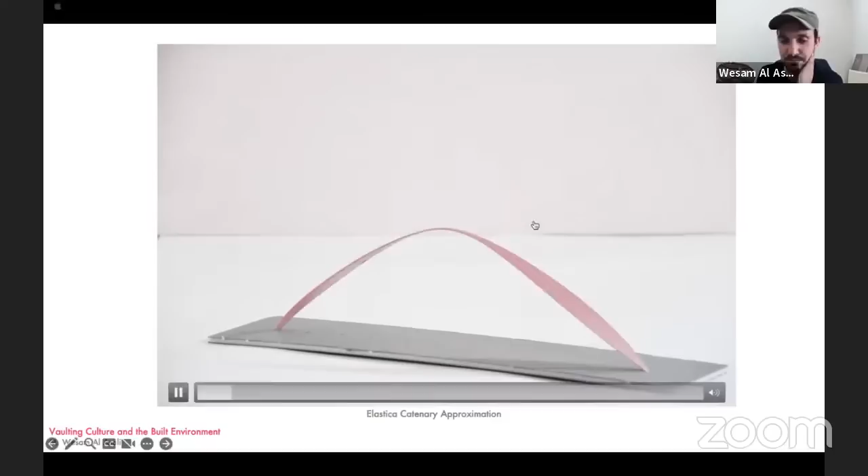The first, actually, it was when I was a student myself. This was supervised by Michael Ramage at the University of Cambridge. It was my master thesis, and my prompt there was to actually invent a tool that can describe a catenary curve so that the builder can use it without the need to actually fabricate formwork for each curved section. So it sweeps, rotates, it opens and closes, but at the same time, whatever it does, it always describes a catenary curve.

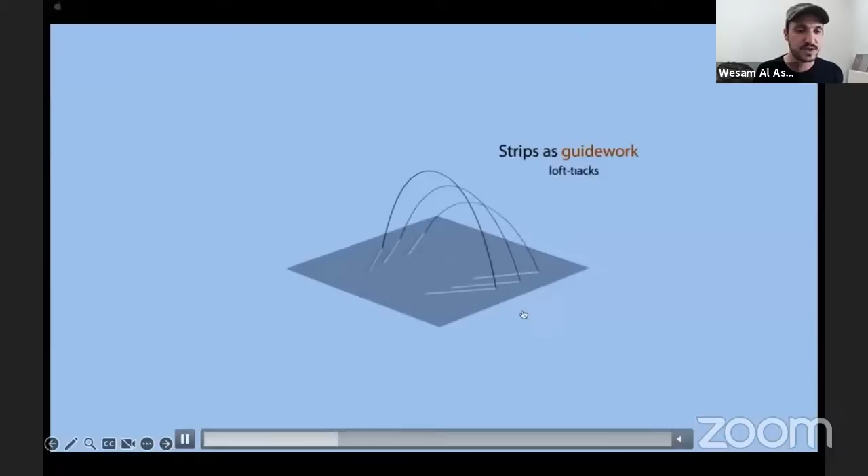And for that, I used different thicknesses along the section to come up with this tool. Eventually we used laminas of bamboo to build the structure. You can see we tested it on 3 small scale vaults so that we can see how much we can take this bending technique to use as formwork in practice. And here is the construction process of the vault.

So when we used multiple ones, we used it as formwork because we needed support. When we used only one, it's not strong enough to support, but it's strong enough to guide the work during the construction.

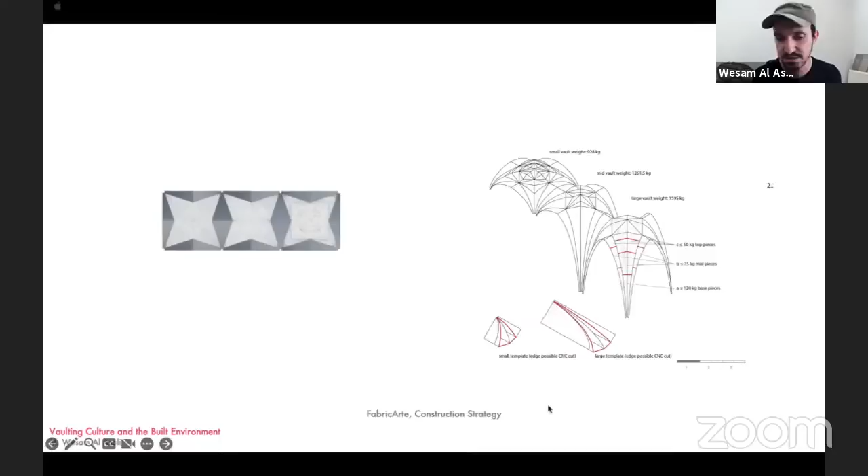On another example, which is FabricArte, this was another project that was also part of my PhD. Here, I was not really investigating the tools we were using, but rather the strategy of construction. For this one, we decided to build a vault, slice it, transport it, and glue it back together again. So it's a form of really non-conventional prefabrication of construction, which has resulted in many problems, but also opportunities.

The design of the sequence of construction was pretty much influenced by manual work - how much a piece can weigh so that two builders can hold it on a scaffold, or without a scaffold. All this informed the way and the design of these structures, which were then fabricated in a workshop, offsite.

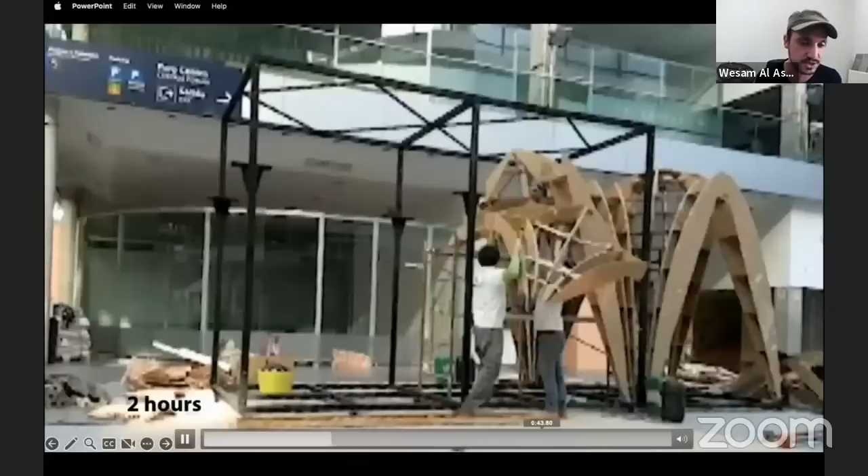As you can see here, we build it, cut it into slices, and then transport it to site. The reason we did that is because on site, we had a really narrow construction window - we didn't have as much time to build a vault with such complexity. So we had to build it in pieces and transport it to rebuild it again.

This was part of the Cevisama exhibition in Valencia in 2018. This project, and the previous project, were also built with the generous help of Salvador Gomis, another vault maker in Spain who's always working with us on the development of these projects and experiments. And that's more or less the final product of this.

The last one, actually this time it was the opposite - Salvador called me and said, I have a project, I need your help, which I find really fascinating as well, since this happens sometimes, not only once or twice. For this one, we had quite a different problem.

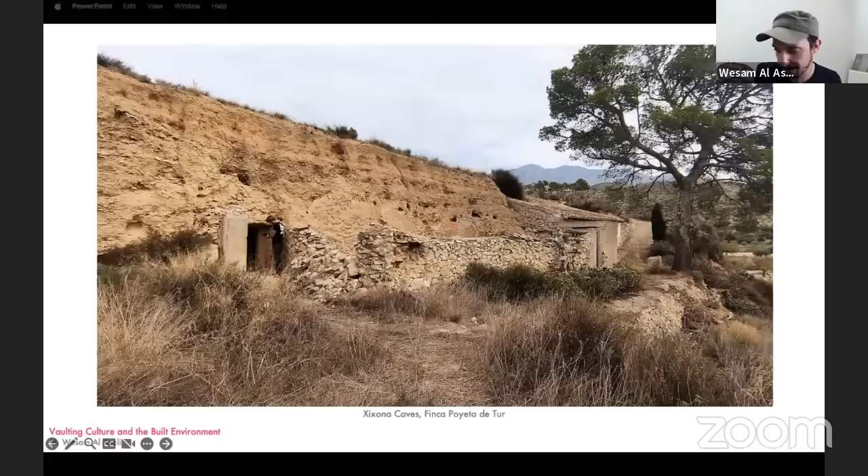We had a cave that was previously inhabited, but it needed rehabilitation. It's a private property, and instead of tearing it down, the choice for the rehabilitation was to do it with tile vaults.

The problem was that we really didn't know what to do with the geometry of the cave itself, because we didn't want to excavate that much, but we also didn't want to put too much material as infill. So what we used for this was photogrammetry to 3D scan the space.

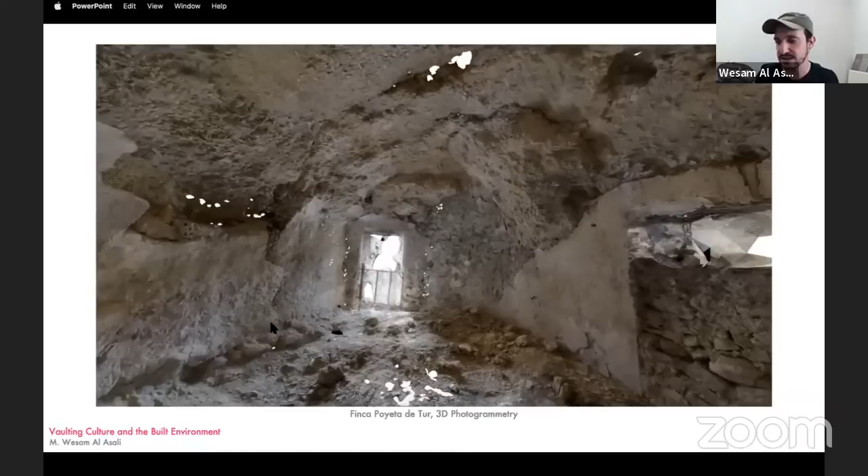We noted on the model of the space the different geological properties of this cave, and then form-fit the vaulted structure so that it can support the cave, contribute to its support, and at the same time not require that much excavation. That was developed through a series of solutions to eventually come up with one.

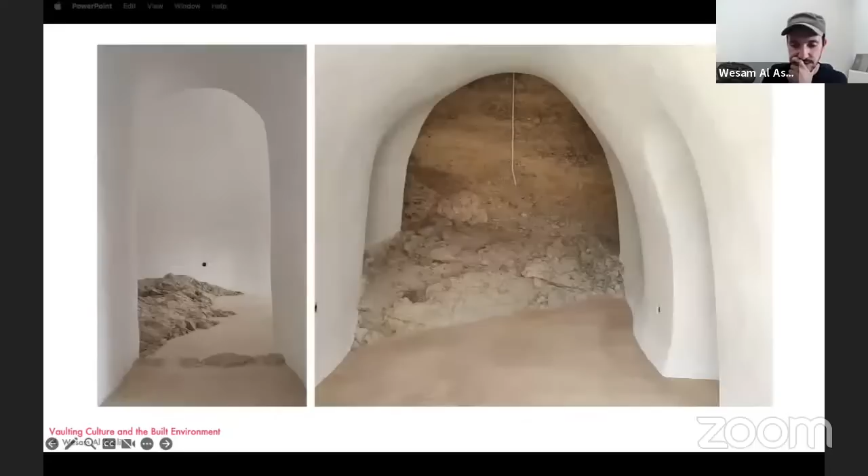So here, the input was from Salvador the craftsperson, from the client, but also from the geology of the structure we were building for. This is a photo of the final solution, and this is when it was almost finished, during construction.

Within all this, we were thinking about a platform in which we actually combine the experience of engineers and builders. And Circa came up as this platform, which was co-founded by me and Salvador.

The main premise of Circa is that now we hear a lot about craft programs being apprenticeship programs in a traditional way, and that takes so much time in today's world, whereas workshops today are very concentrated - a two-week thing where you learn about the technique but never practice it. Instead of approaching that through two timelines that are not identical, we thought about making it more of an activity and a community.

So whoever is part of any of the workshops will always be supported by advice, consultancy, and maybe extra sessions if, for example in a project, they wish to continue their learning.

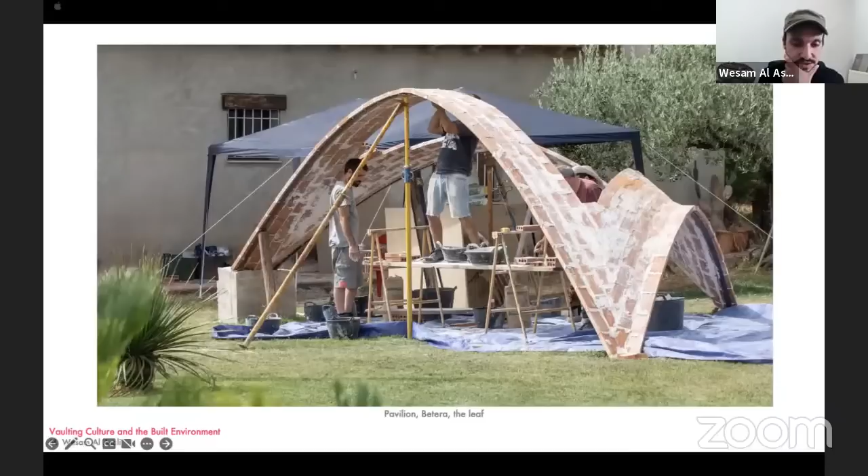And with that, I would like to finish my little explanation about the experience of Circa and my experience also working with tile vaulting, masons and builders. I think that concludes our presentation.